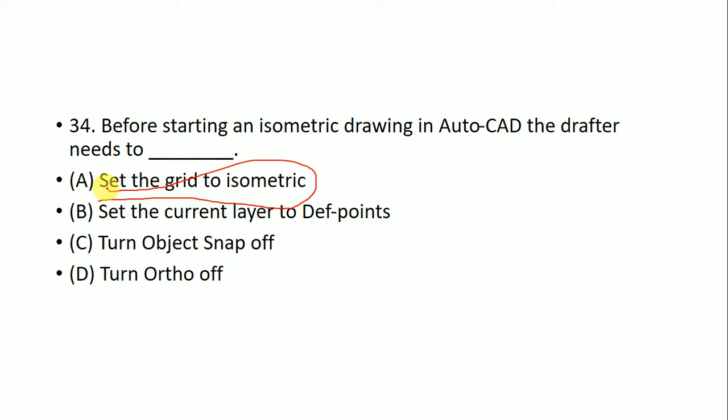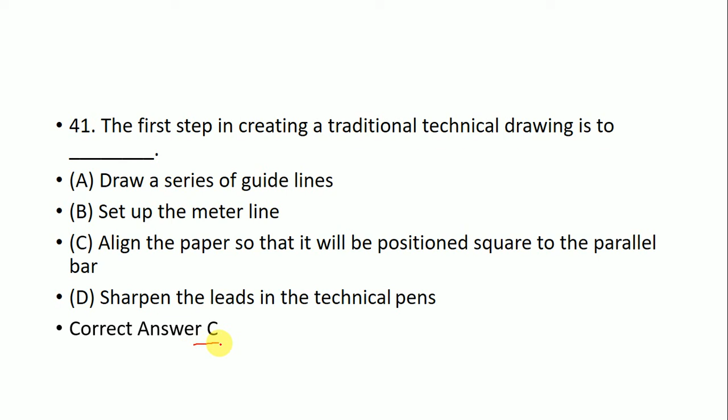The first step in creating a traditional technical drawing is to what? Draw a series of guidelines, set up the meter line, align the paper so that it will be positioned square to the parallel bar, or sharpen the lead in the technical pens. The correct answer is C. Align the paper so that it will be positioned square to the parallel bar. Okay friends, let's move to the next question.

To ensure that everyone understands what the electrical symbols represent, it is customary to include a what on the electrical sheet: list, parameter, electrical legend, or electrical layer. The correct answer is C, the electrical legend.

Question number 43. The primary unit of measurement for engineering drawing and design in the mechanical industries is: millimeter, centimeter, meter, or kilometer. The correct answer is A, millimeter.

Question number 44. In order to create an isometric circle to represent a hole through the top surface of a box, the drafter must ensure that the correct isoplane has been selected by scrolling through the isoplanes using the what key? F1, F3, F5, or F8? The correct answer is C, the F5 key.

Okay friends, be focused on the questions so that you can understand.

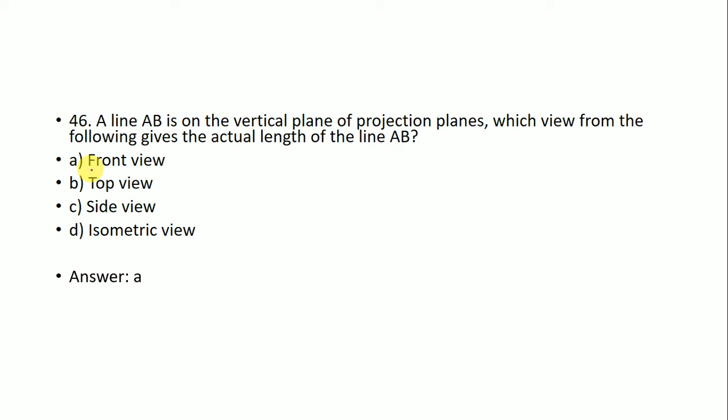Okay, friends. The explanation is that any line that lies on or is parallel to any plane in a projection plane, the true length will be found at the view which is drawn onto that plane. Here the line is on the vertical plane, so the view which falls on the vertical plane gives the true length, which is the front view. So front view is the correct answer.

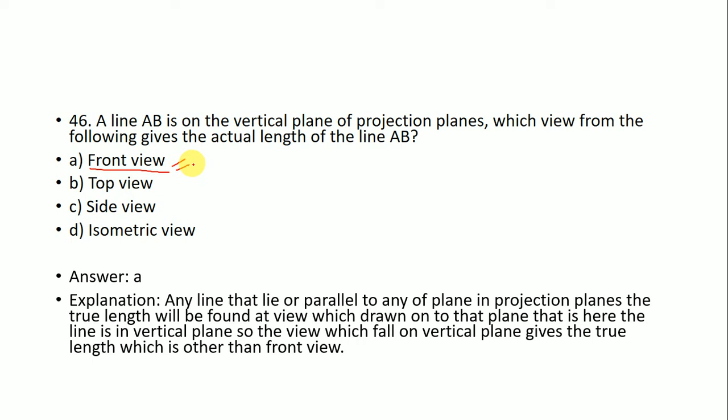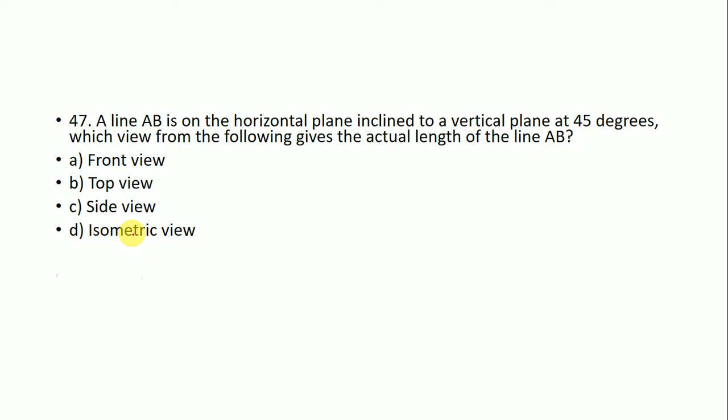Next question. A line AB is on the horizontal plane inclined to a vertical plane at 45 degrees. Which view from the following gives the actual length of the line AB? Front view, top view, side view, or isometric view? The correct answer is B, the top view.

It is top view because any line that lies on or is parallel to any of the planes in a projection plane, the true length will be found at a view which is drawn onto that plane. Here the line is on the horizontal plane though it is inclined with the other plane. The true length will be given at the view which falls on the horizontal plane, which is the top view.

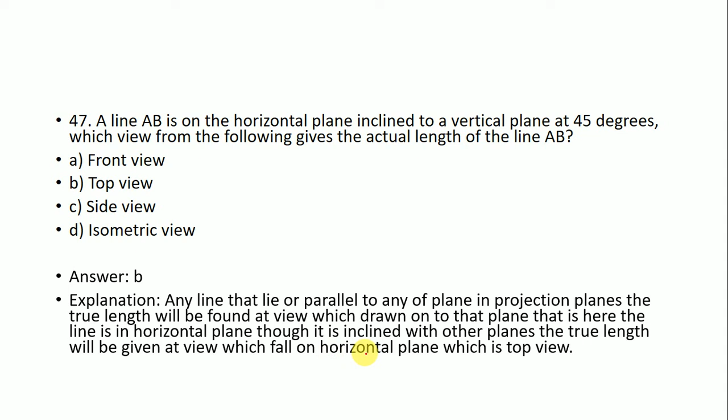The line PQ lies in both the vertical plane and profile plane. The front and the side view of that line coincide at the vertical reference line. Is it true or false? The correct answer is A. It's true.

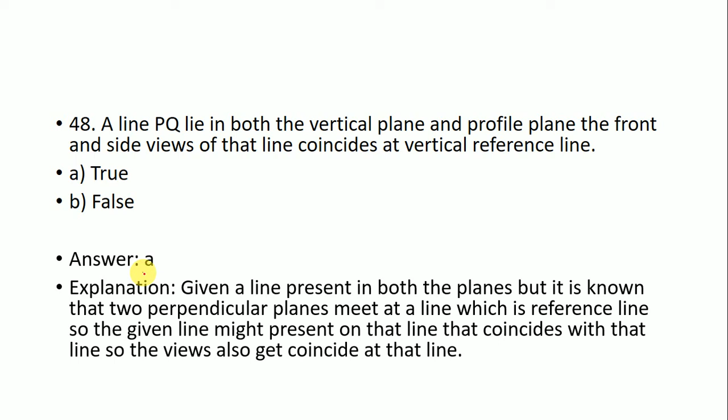The explanation: a line is present in both the planes, but it is known that the two perpendicular planes meet at a line which is the reference line, so the given line might be present on that line and coincide with it. So the views also coincide at that line. That's why this option is true. Okay friends, let's move to the next question.

If the line RS lies on both the vertical and horizontal plane, then which of the following two views coincide to give a line again? Front top, top side, side isometric, isometric front. The correct answer is A, front top. Front top is the two views that coincide to give a line again.

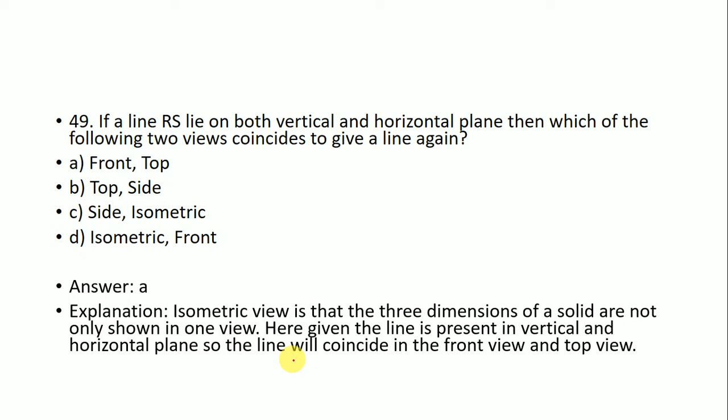It is because the isometric view is the three-dimensional view of a solid, not only shown in one view. Here the given line is present in the vertical and the horizontal planes, so the line will coincide in the front view and the top view. Okay friends, be focused, stay focused and do a proper study by focusing on the questions.

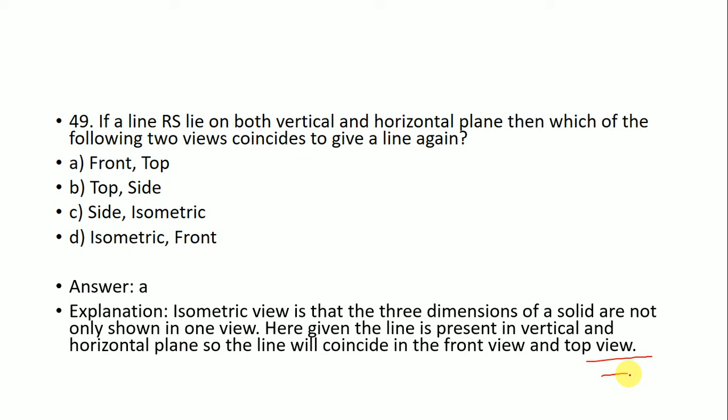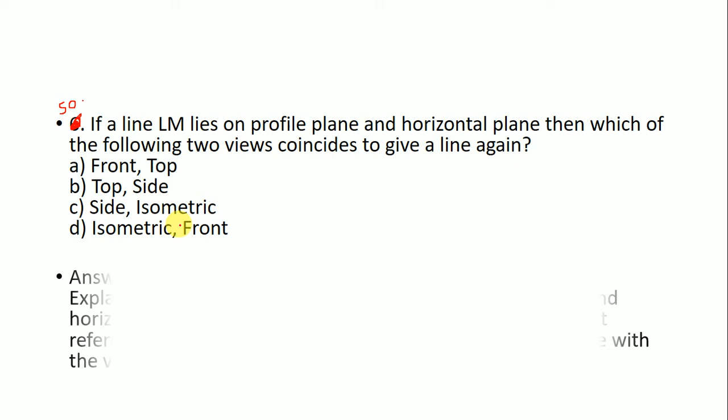Okay friends. So friends, if a line LM lies on a profile plane and a horizontal plane, then which of the following two views coincide to give a line again? A. Front top. B. Top side. C. Side isometric. D. Isometric front. The correct answer is B.

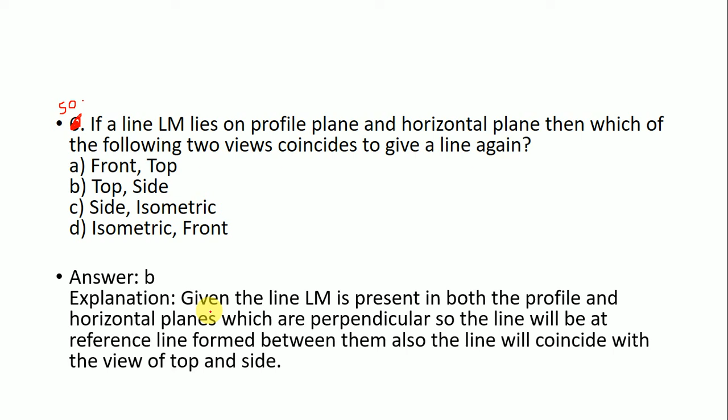It's top side. The given line LM is present in both the profile and horizontal planes, which are perpendicular, so the line will be at the reference line formed between them. Also, the line will coincide with the view of the top and side. So friends, that's all for today.